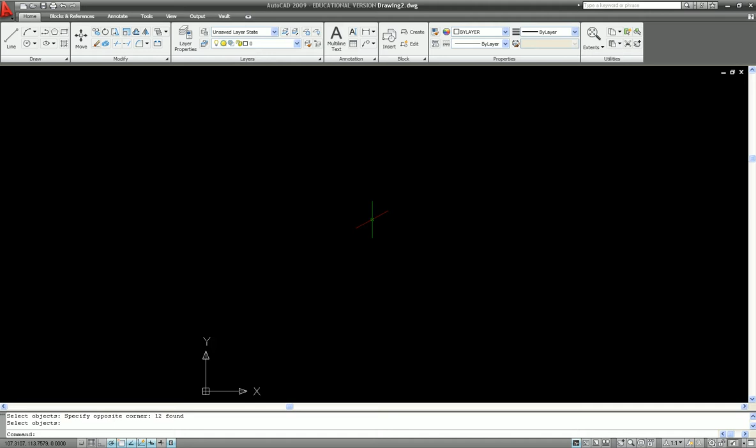Like I said, with this one, there are multiple approaches to exactly how to do this particular object. The approach that I'm going to take is going to start with the top plane. What I'm going to do is draw my line straight back 50, come back down 40, in 10, back 30, down 40, and then close that off. That is the upper left side.

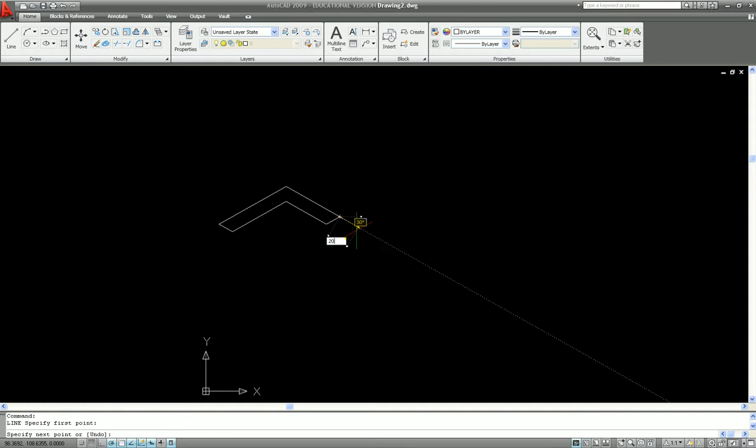Now what I need to do is, since this is 40 in two places, that means there's a gap of 20 in between these two. So I'm going to do a line right here, 20. And then I'm going to do my line 40. We'll come forward 50, in 10, back up 40, up 30, and close that off.

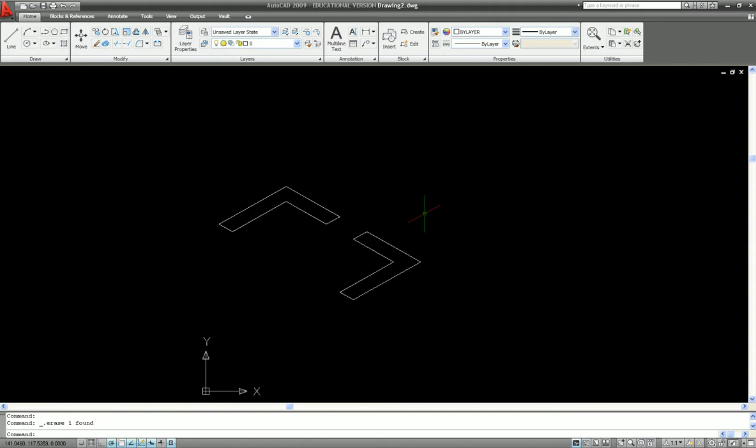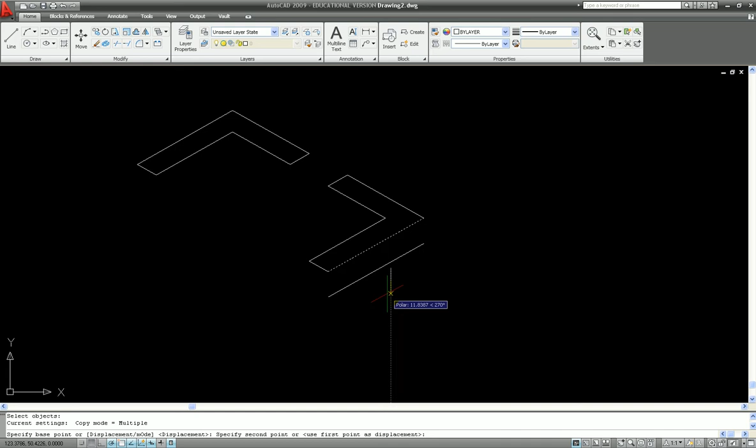Now before I do anything else, I want to get rid of that line because I know that I am not going to use it. Now what I'm going to do is bring all of my edges down the appropriate distances to build this particular piece. On this one here, I need to bring this line down, and I'm going to copy it—you never want to offset. I'm going to copy this straight down 30. And what that 30 does is it allows me to go ahead and form the right side of the object.

So now I have most of my right side done. In fact, I can now just bring a line in here, 30, up 15, back in 20, and close that off, and I've got that particular piece done.

For this side, it's going to be a little bit different. I know that I'm going to have a line that comes down here 30. And then I can bring out that same situation that I did before, come out here 30, up 15, back in 20, and then straight up to here. Well, now this is where I can make my life just a little bit easier, and I can copy all of these leading edges, including this leading edge, down from here to here.

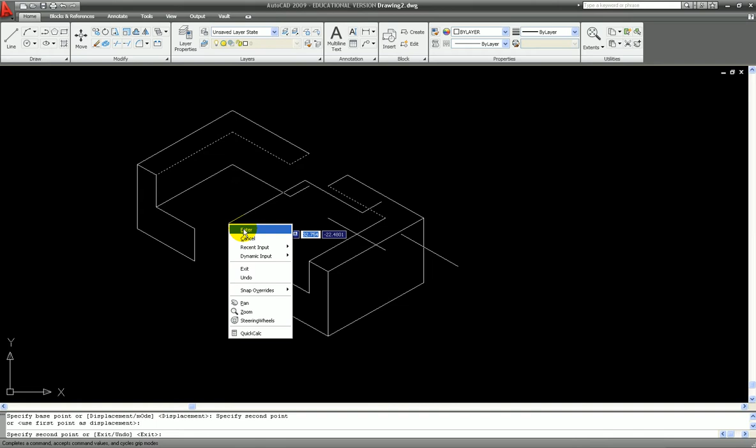Now all I have to do is draw in my corners for these spots here, draw in a 30-degree corner at that spot, or an edge, trim using this piece, and now you can see that I've got the majority of this shape complete.

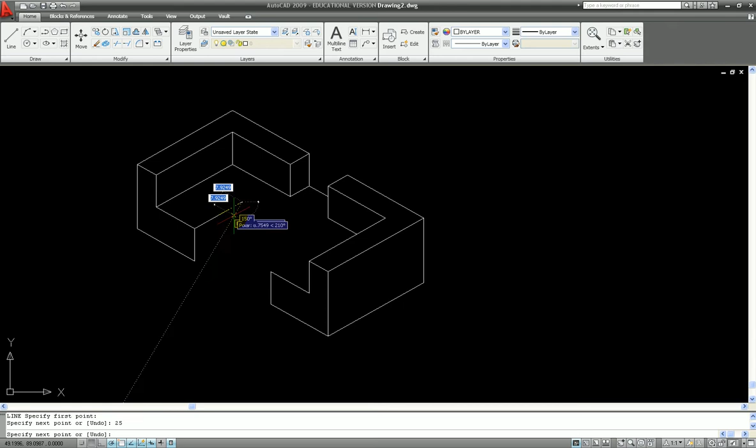Now what I need to do is draw a line that goes back 25 and over 40, and that's going to connect back out to this piece. Now I can copy these two lines from here to here, draw in this corner, and trim out this line. And what you'll notice is, just by copying and drawing the lines, I now have the completed object for exercise 5-7.